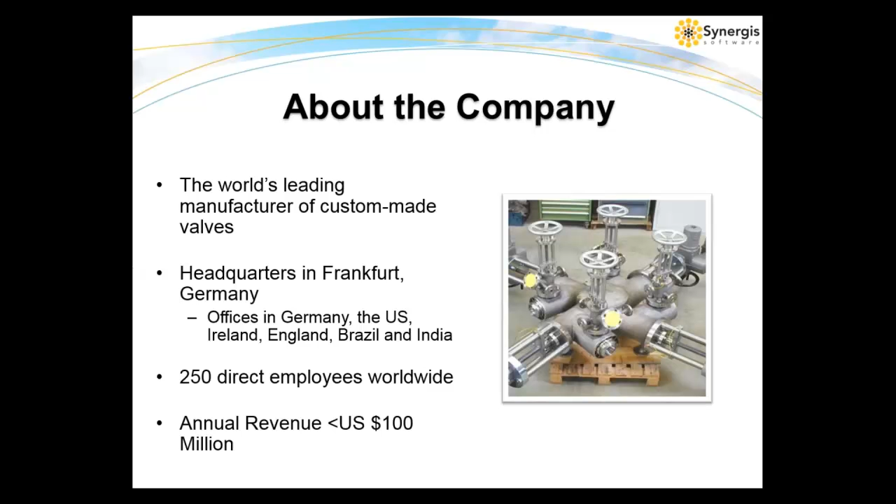SchuF Fetterolf is the world's leading manufacturer of custom-made valves serving many different industries. Customers of theirs depend on them for diverse industries such as chemical, fiber, pharmaceutical, and other process industries.

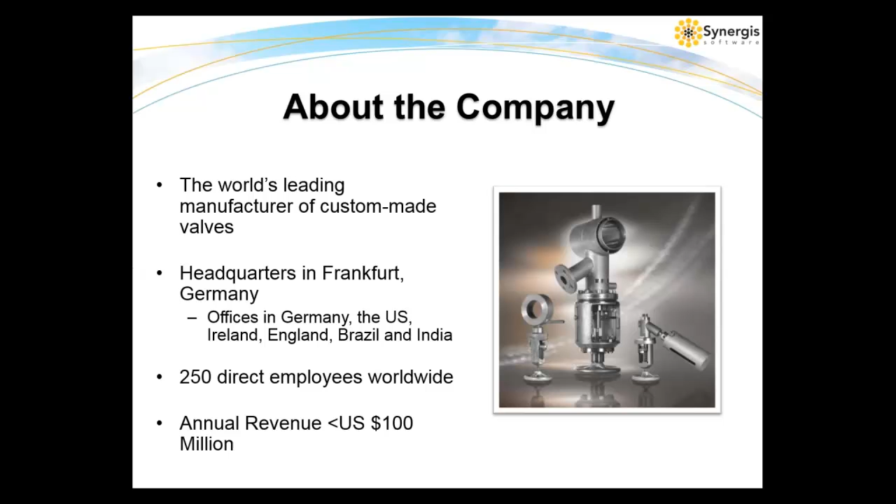SchuF's headquarters are in Frankfurt, Germany, with additional offices in Germany, United States, Ireland, England, Brazil, and India. They directly employ 250 people worldwide, and they have annual sales just under $100 million.

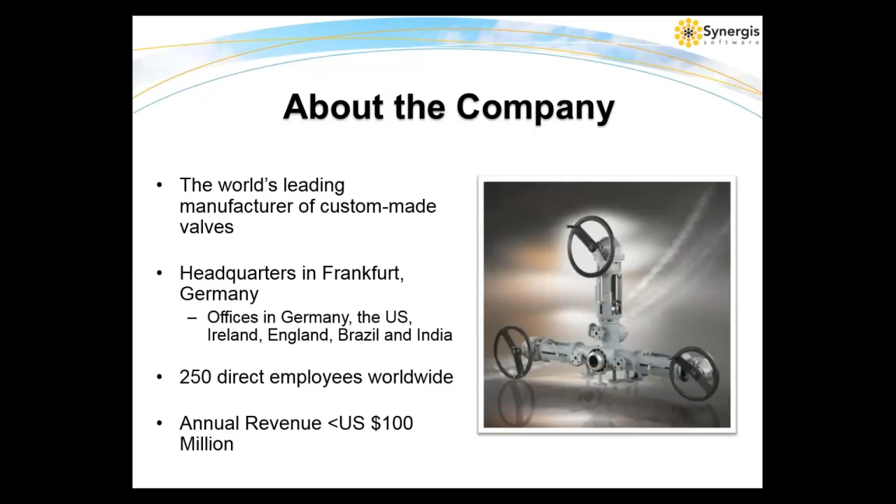SchuF's business challenges as a global manufacturer are similar to many multinational companies. They're continually under pressure to get their custom valve designs to market faster while maintaining the highest quality assurance and service.

They need to ensure resource leveling across global design centers to maximize efficiency and productivity. They also need to centralize all designs under one umbrella to enable design reuse, with a single integrated data management system for all global sites.

They need a PDM solution that provides the tightest integration with SOLIDWORKS and AutoCAD for revision control, design reuse, collaboration, compliance, and workflow automation. SchuF Fetterolf is also extremely focused on achieving their revenue and profitability goals. They need to control product costs, improve design process, and eliminate both resource and material waste throughout all global sites.

So in short, their goal was to create a single centralized repository of data that allows fast access and the ability to share licenses across continents and different time zones.

So why did they choose Synergis Adept? First, the product met their technical requirements, including Adept's very strong SOLIDWORKS integration, its ability to support central database managing data across global operations, the built-in viewer with markup and compare capabilities was huge, and a flexible license model that would handle concurrent licensing. All of these made Adept an excellent fit for SchuF.

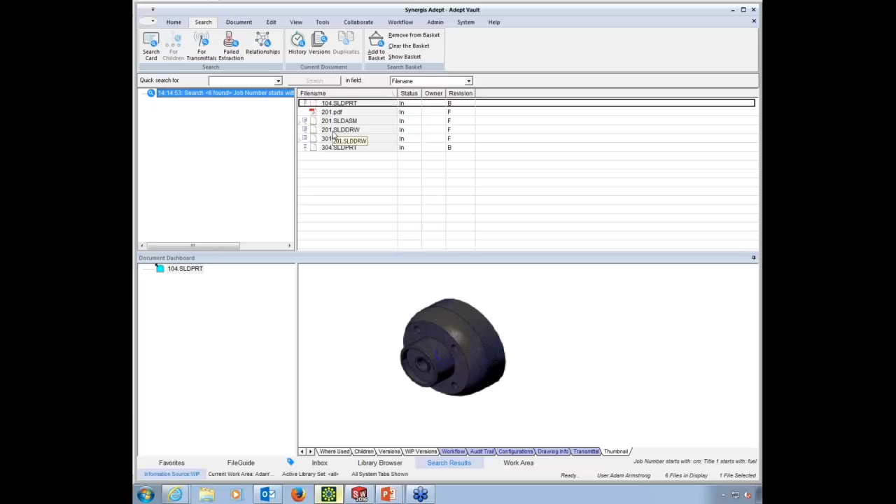These are extraction fields. They're linked to properties inside of, in this case, the SOLIDWORKS assembly, but they can also be linked to properties in Word documents or Excel spreadsheets—think of change notices or work orders. Same thing goes for attributes in AutoCAD drawings and properties in other CAD file formats like Inventor and many others.

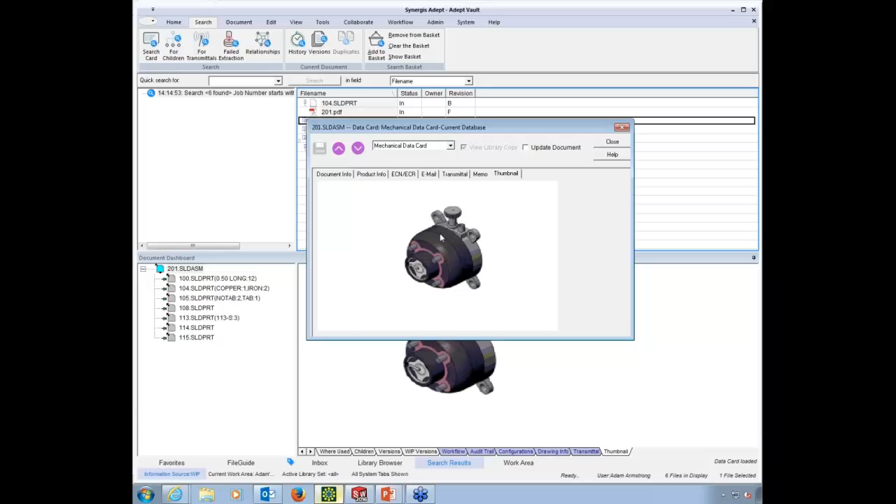Now, the arrangement of data here is my own choosing. I've got some fields and tabs for other document types. I've got a memo field where people can type in notes to each other, even see an image. There's a quick thumbnail of the file itself.

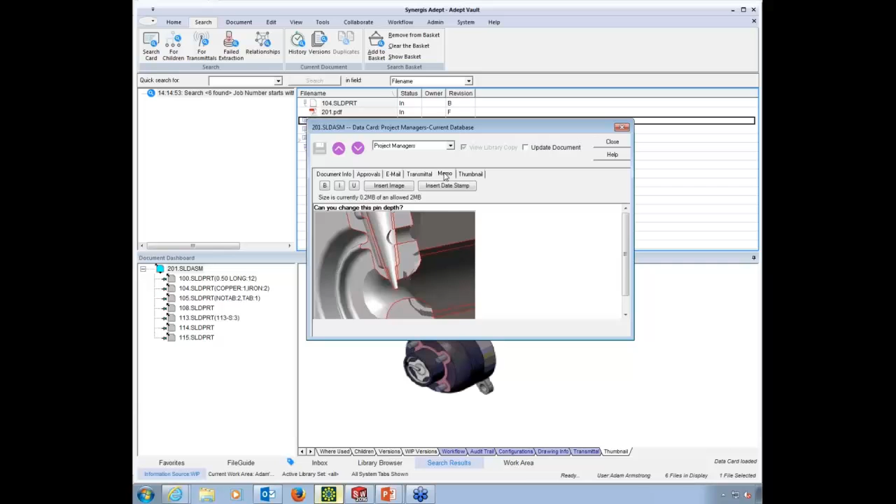Now, this card was designed for one group of users. It was laid out just for them. But you're going to have other groups that will want to look at things a little bit differently. Perhaps you've got some project managers—this is what they want to see, these are the fields they want to search on to find that document. Some of these might have exactly the same information in it. Some of them might have tabs of information that only they're supposed to see and others aren't. So these can be configured by administrators for your different groups or different roles of users.

Now, this data can also be used to locate documents in other ways. I can do it through a quick search rather than opening up the search card. If I know part of the file name begins with 20, I hit enter, and here's every file I have access to that has 20 in the file name. If 90% of the time you go looking for files you know the part number, or the job ID, or whatever field you might want to use, you can use that.

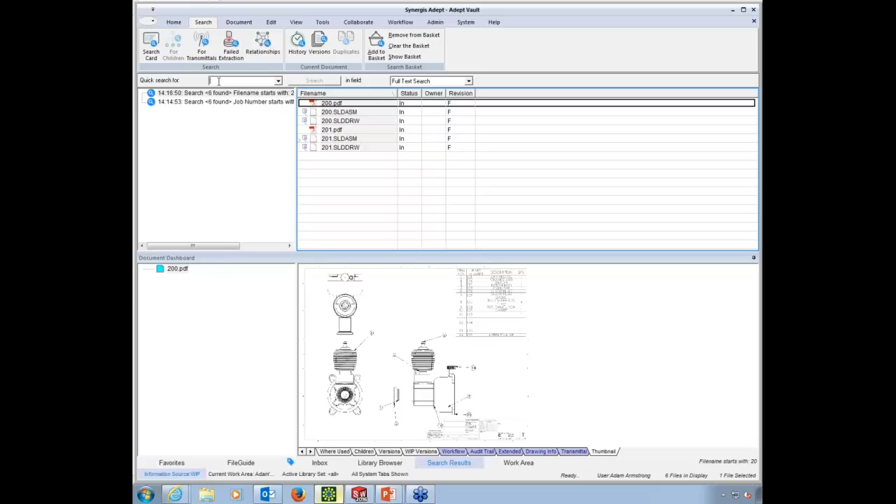There's also full text search in here. Perhaps you're looking at a printout or a plot and you see a certain word on that document—here's every file in the system that has the word 'initial' somewhere in it. It doesn't have to be a property, it just has to be text inside of the document. That'll work on a lot of file types, but not all. For example, full text search will not work on photographs, bitmaps, or JPEGs.

Another tool to locate files is called the File Guide view. What this does is sort the documents based on data that's familiar to you. For example, here I've got everything I have access to, but it's organized by product type first. I can click on that product type and see everything for it, then the next level in this example is who the designer was, then a file extension. I've located the files in a way that means something to me.

But another group may not understand things in that fashion. They might do things based on the job number first, then after going to a job number, go to a product type and maybe a file extension. They're still finding the same documents—they're just sorting them in a way that means something to them.

When Adept helps customers, when Synergis helps customers roll Adept out, we'll ask different groups what are the 2 or 3 general pieces of information you always know when you look for files. Based on their answer, that's going to make a great file guide view for them.

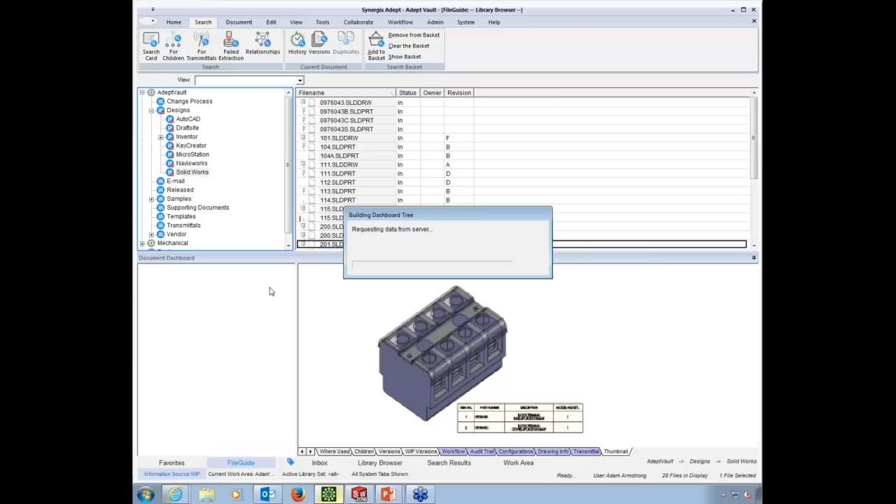There's also one called Library Browser that is the actual folder structure. For those users that in the past used to go to a J drive, then a Vault folder, then a Designs folder, and drilled their way down through subfolders to get to the files they want, they can still do that. The same structure is right here as was on the server when you first pointed Adept at it and asked Adept to manage those files.

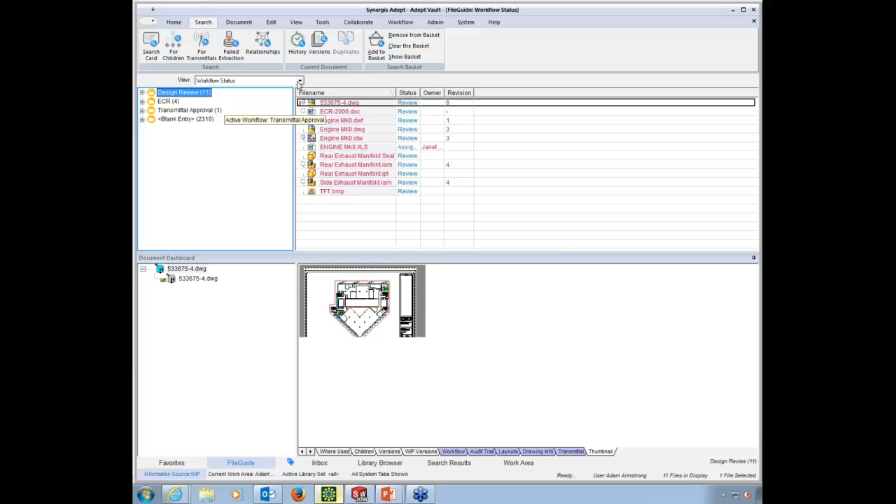What we find is most customers will fall back on this folder structure when they initially start using it, but very quickly they gravitate towards the FileGuide view to sort files based on information they understand, or they like going by the quick searches, being able to just type in one piece of information. There's also the ability to save any of your searches or lists as favorites, so very quickly you can just go right to those files without even dealing with the folder structure.

But regardless of what method you like to use, when you locate a file in Adept, you only find the latest version of that document, period. It's only when you have it selected down here in the document dashboard that you can see there are older versions of that document. Some users won't have any access to these older versions.

Others will be able to go back and copy an older version to create a new design. Maybe it's just like this one, but more like it used to be back on Rev D, and we want to get back to that one. So Adept will manage all of your older versions automatically for you.

For some of our customers, they'll track a separate field of information called revision, because they want to be able to bump up the revision when they want to. But Adept also has a feature that can automatically bump up their A's to B's and their 2's to 3's, and they can do that as properties or attributes in the drawing files.

Also down here, we're able to see all the relationship information. You may notice there's some different symbols next to these files. Those are dictating that there are parent and child relationships. Just by clicking on one, immediately I can see a listing of children, and I can get a detailed listing of the children.

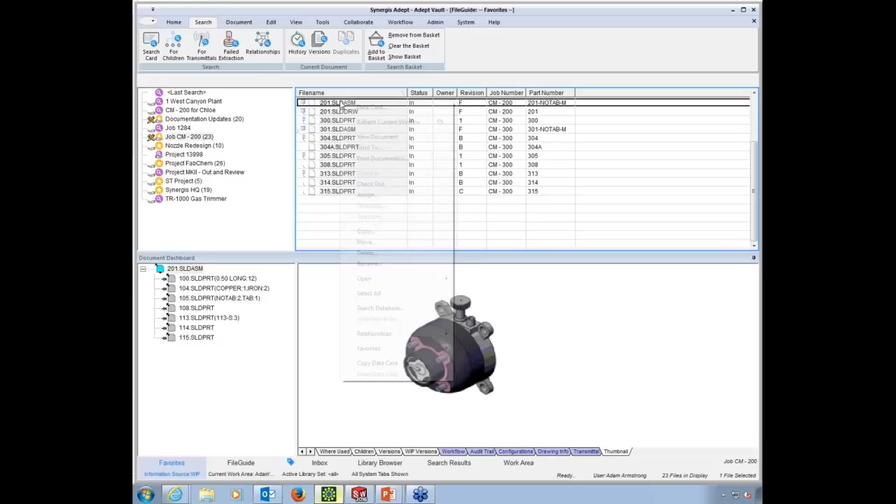Integrated with every license of Adept is a visualization tool from Oracle, which enables all users to view hundreds and hundreds of file formats without requiring that specific software on their system.

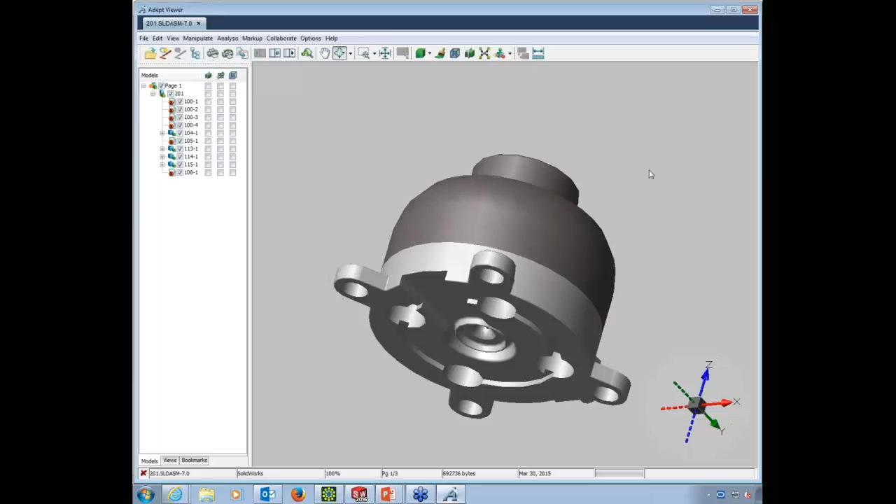So users can go in and be able to look at an assembly file or a drawing file without needing that software. I can zoom in and out, and I can turn parts on and off.

There's also an integration with this viewer from Synergis that controls what users can do. For example, some users, the option to print for this job might be grayed out. You may want a certain group of people not to be able to print or plot. Same thing goes for converting to other file formats like PDF or JPEG. You can give or take away that ability.

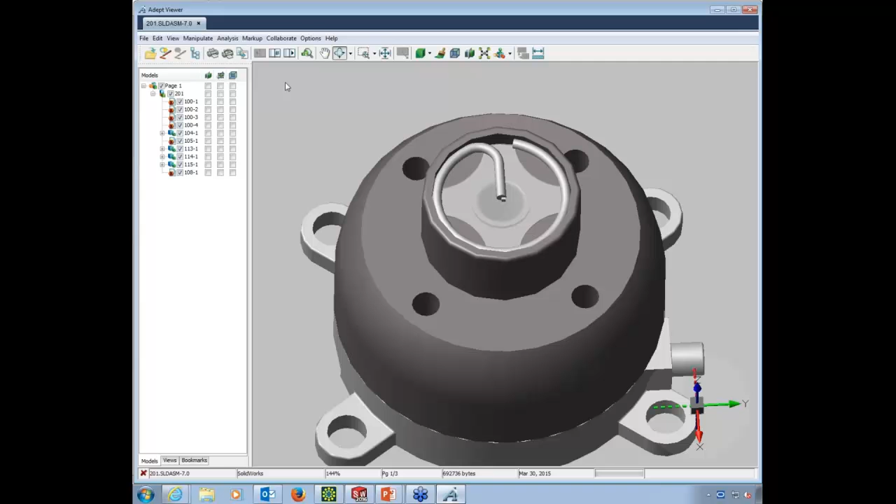Marking up documents, same thing here. I can go in and say I want to create a note right from this edge, and I'm just going to put in a small leader, and I'll say change cover.

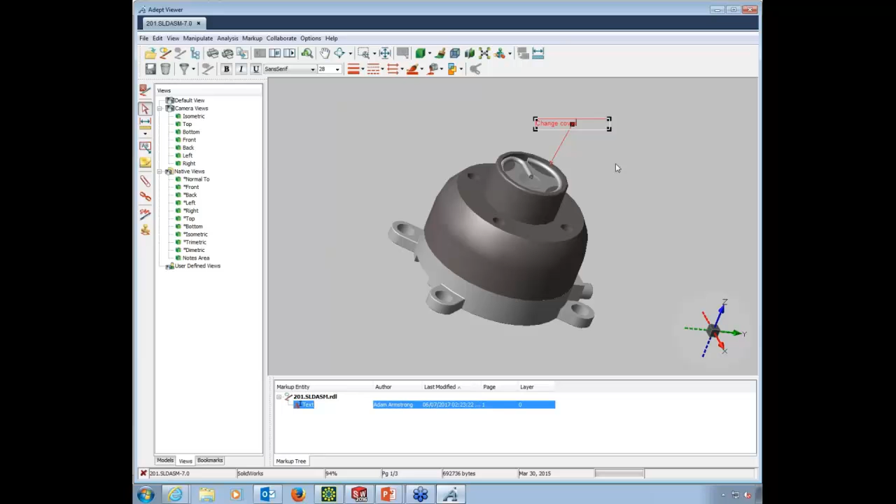And you'll notice down below that it keeps track that Adam made that comment on a specific date and a specific time. If somebody else comes in and adds their own comments or markup information, it'll keep track of each of those down below.

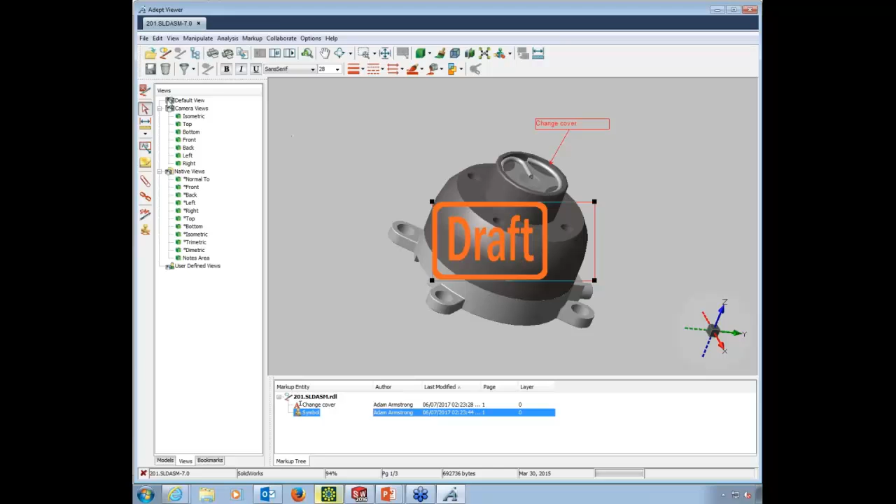Another big benefit is that this file itself isn't being edited. There's no editing allowed from the viewer at all. So I can say yes, I want to save this markup information, and Adept saves that as data about that version of the file, in the red markup or red line memo field. So when somebody views this particular version, they'll be able to see that markup information.

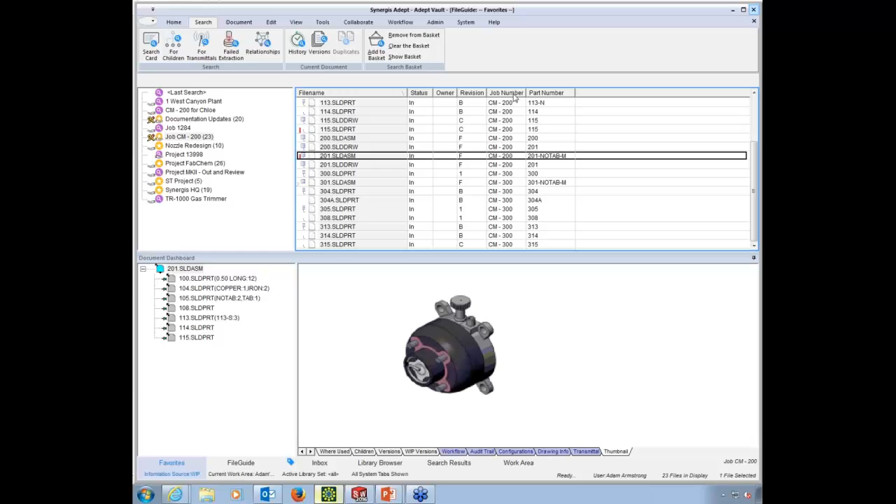Also, I forgot to mention these columns of information. Anytime you have a listing of files, you can pick and choose a subset or a whole group of them, and there's the ability to go create reports. You can do quick portrait reports, landscape, formatted reports, and it'll use the data you've got selected here. So very easy to go create different file lists.

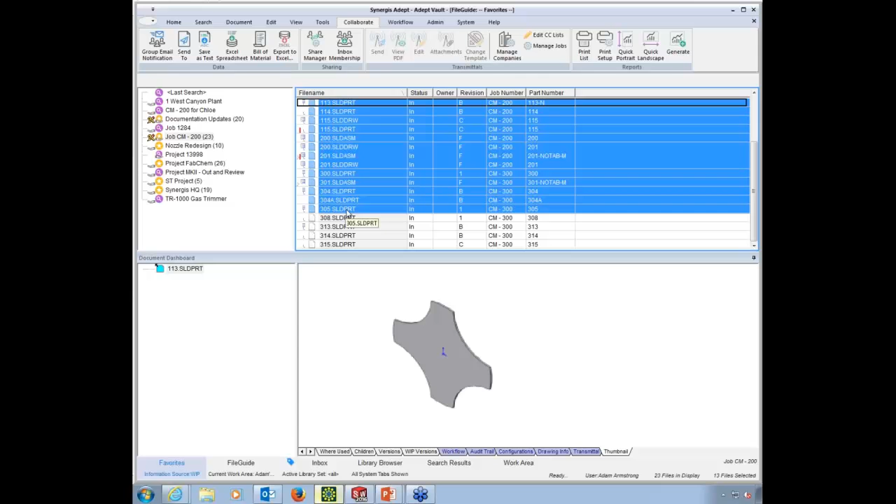Now, for some of our customers, this is the beginning of a change process. They found a file, and typically it would have been the drawing file. We're going to work with the assembly today. But they would then, after marking it up, right-click and maybe just assign it to somebody for them to do the work.

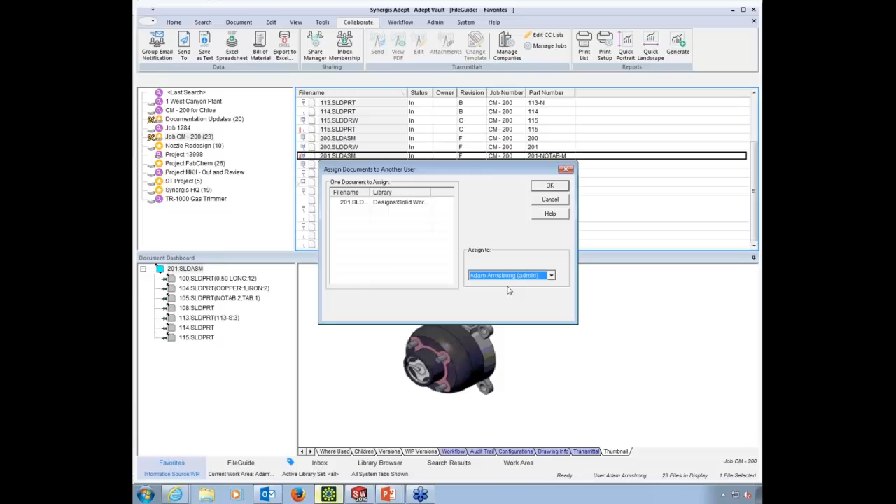So in this case, I can pick Adam, and if I've got it configured, that could send Adam an email. And in that email would have a link that would bring him right to the file I assigned to him. If I had selected a 1,000-part assembly and assigned them to Adam, he would get one email with one link that brings him to a listing of all 1,000 files.

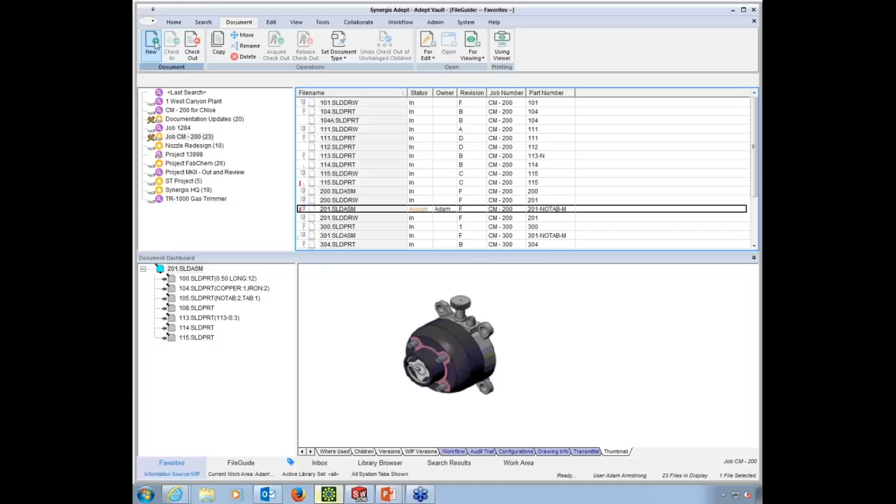But for some of our customers, they want a little more of a formal process besides marking it up and assigning it. They want users to be able to create new documents right from within Adept, and you can do that. So right from here, I can say I want to create a change request.

It's using a specific template. I've set up a naming convention where it requires some information, and I'm just going to type in a few key pieces of info, and this is building a file name. Adept also assigned it a next available number as part of that file naming convention. Every customer of ours has a different naming convention. This is just one example of one.

And in this case, I'm going to open it up inside of Excel, but this template could have also been a Word document. Excel is giving me a hiccup here. There we go. So here I can see I've got different fields of information.

And these are all properties. So if somebody types in any information, it will automatically fill in. I cheated a little bit - I created some of these other fields. I've got some where engineering review can put in their name and their signature and any notes that they may have. So all of this information is linked to Adept.

So when I come back here, you're going to see in a second, there it goes, it just read that information. If I look at the data card, I created a special one just for this type of stuff. You can see that's exactly what I typed in. So that becomes very useful information that doesn't have to be typed in twice. In fact, some of our customers don't even open up the document.

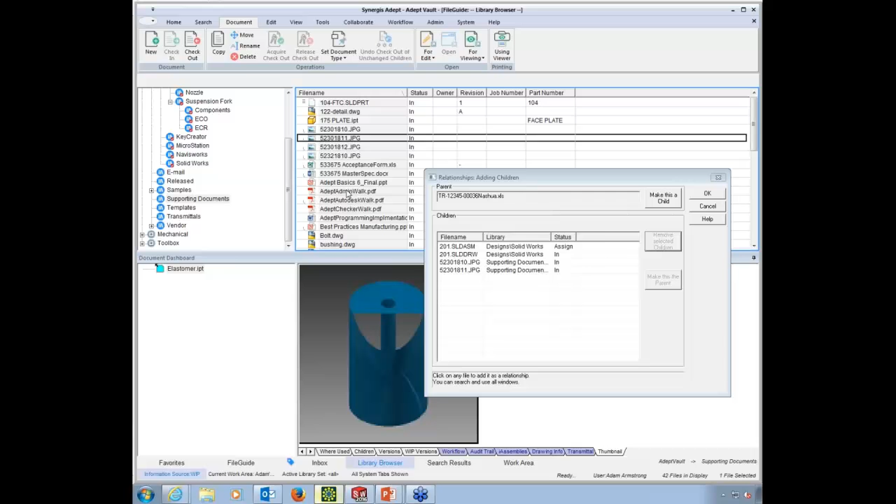I can also use other search methods and say there are some supporting documents. There's a JPEG, 2 images of the problem, and a master specification.

So now the idea is very simple. Anytime somebody finds this change notice, right away they can see a listing of all the related children. They don't have to go to those separate folders to locate those files. Right from here they can view them or check them out or mark them up or print them, whatever they need to do. So you're creating your own packages.

All right, so as a designer, I've gone in and I've located my documents. I know I'm getting the right one. We talked a little bit about this audit trail down here and everything that's happening to those documents for different regulations or audits that you have to go through. That's very useful information. Actually, I got to go back to one of these guys here.

There we go. So if we look at the audit trail now, we can see this is all searchable and reportable information. So as a designer, I'm going to kind of switch hats here.

Maybe I'm ready to do this actual design work. I can right-click and check it out from here, or I can go right to the CAD application. So in this example, I've got something called the Adept task pane inside of SOLIDWORKS. The exact same task pane is also located inside of AutoCAD and Inventor. The idea is very straightforward.

If I need to perform a search, I can pick and choose whatever fields I want to use, so each user can pick the ones that they most commonly want to be able to search on. In this case, I know part of the job number, I can type that in.

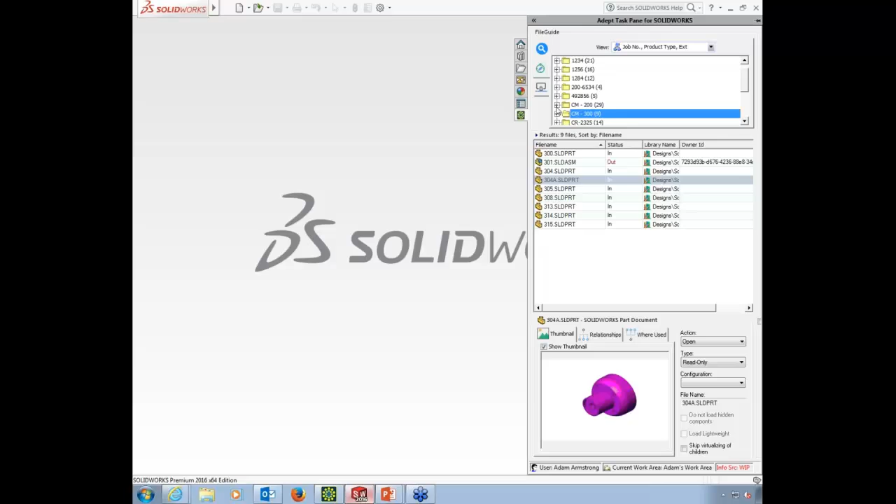Let me try that once again. That was weird. If I want to see the file guide views, I can use those, so I can sort based on the job number. I can locate the files in that fashion.

So the same tools that we saw on the desktop, you can also have right here inside of, in this case, SOLIDWORKS. If I'm ready to work on something, I can open it read-only or check it out. I can also look to see if anybody else is currently editing any of the other files. And all actions with the task pane are drag and drop.

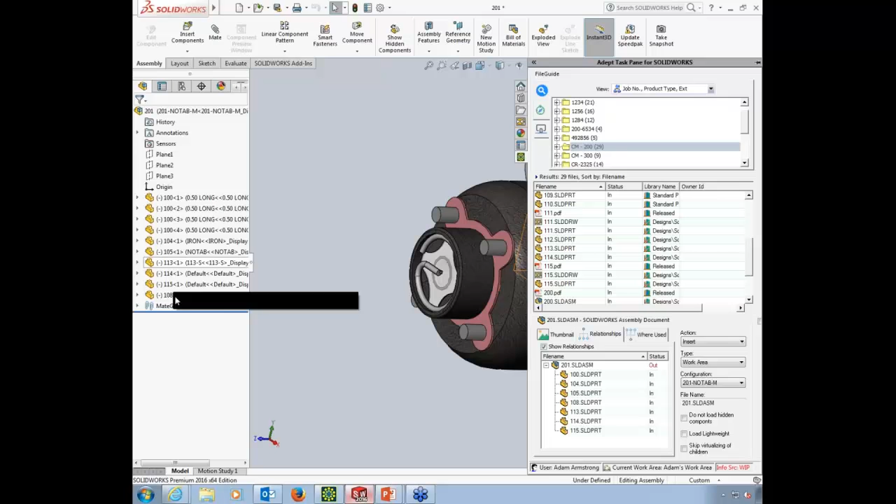Adept knows that I need to be able to see that entire design, and so it loaded up all those parts in the background for me. So I'm referencing them all locally. I don't have any editing rights for those.

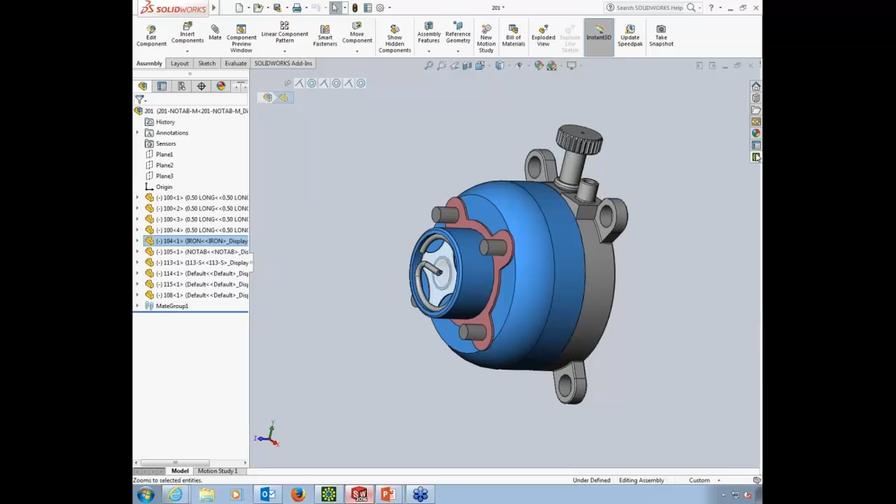If I do need to edit one of these at any time, I can just right-click and I can check it out. Or I can even look at the Adept tree structure up at the top, and I can check those out from there. I can also use this same task pane to insert other parts.

If I come over here, I can select a replacement for the one that I've got. Let's see here, we'll get a thumbnail view and take a peek at this one. That's the new one I want. Rather than insert, I can just go with a replace, drag and drop. And granted, they had to have the right mate locations for that to work smoothly, but all the action, the interaction is done with drag and drop.

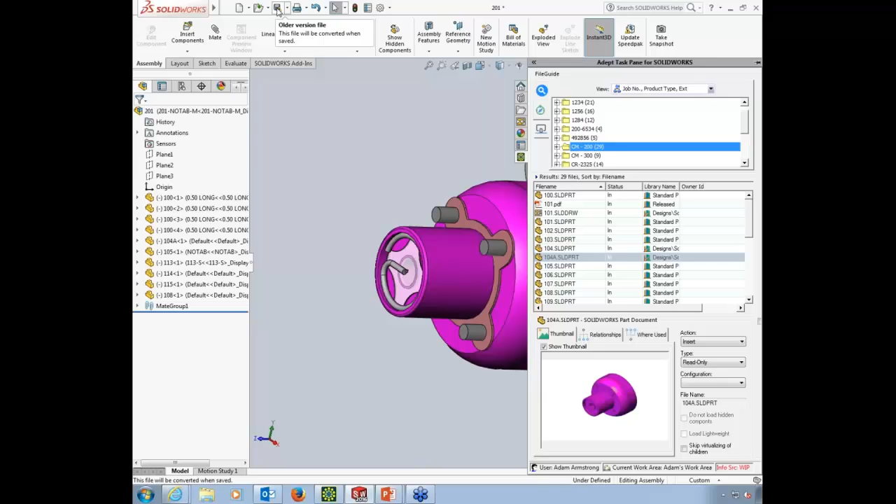And again, that goes for Inventor as well as AutoCAD or AutoCAD-based applications. So I could also just very, very easily go and check out the drawing file for this right above it and have that update as well.

For the sake of time, though, I think we're going to go back to the Adept desktop. And so while I was editing this file, everybody can see in bright red that Adam has it currently checked out.

It doesn't matter what search method they use, there's only one method of locating that actual file, so everybody knows, and it copied that file and put it in my work area. My work area is just my own local folder.

This can be configured by an administrator for users so they can decide where people's work areas are, or they could be given the ability to create their own if they have a need for that method as well. So now that I'm done with this, I'm ready to check it back in. But before we get into workflow or what's going to happen to this file as it gets checked in, I want to mention a couple other items that I think are really important.

One of those is bill of materials. Adept has the ability to go and create a bill of materials from SOLIDWORKS using the Adept relationships, meaning using these relationships it will create a bill of materials.

For some of our customers that's really important because they create records that represent parts they don't actually design, and they create those relationships just like I did earlier with that change notice. I right-clicked and said add a relationship, so I could add a certain kind of packaging or a certain kind of grease or paint, but that would then be in that bill of materials.

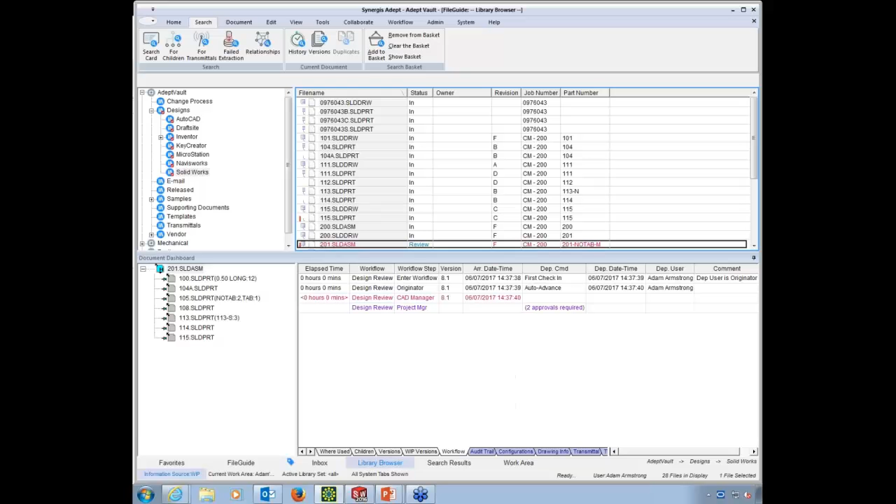That's an option in Adept. You'll also notice if we come back to the structure here, we can see it's in review, and if I click on the Workflow tab, I can see exactly what step of the process it's in and what steps it still has to go through before it becomes approved. I can right-click and say who's responsible for that, and it'll tell me who's in charge of those steps.

Those users can also use this WIP version where they can select both versions of the file, view them both at the same time and compare them, and it'll highlight in color what's different between them.

But for the sake of time, let's say that I came in and approved this document. I also set up a rule that it cannot move on to the next step unless they type in some kind of a comment, just to make sure they were paying attention to what they were doing. Now we can see down below here that Adam says it looks great on this date and time, and now we're waiting for two folks in the project managers group to approve it, and then it'll become the new official version.

So Adept enables you to create your own workflows. You can even assign the ability to some of your user community as workflow administrators, and they can take care of their own processes.

And this can be for any process, like a vacation request. If somebody comes into Adept and says file new, fills out a vacation request form, and saves it into the HR vacation folder, it'll begin that process.

Here's the design review process we were just looking at, and it has 3 different steps. I can add and remove steps, rearrange their order if necessary. I can set up emails to go out on final approval—this may be for non-Adept users, just people that need to know it's hit the end of that process.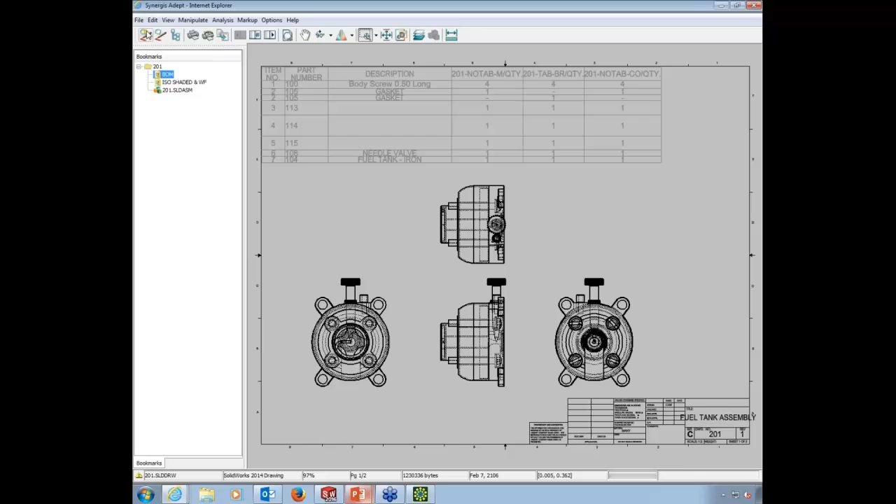So this viewer really enables a lot of users without any kind of CAD software or any high-end system, really just a web browser, to be able to go and view, search, print, markup. They've got the same tools. If somebody else had these marked up, they'd be able to come in and add other comments, zoom in and out, all that kind of stuff. Very, very powerful. So these are really able to give all of your users in very different teams very quick access to documents with nothing being installed on their system.

All right. So all of these things that you've seen today really mean a lot of great things for our customers: faster product or project delivery, more efficient operations, improved quality, lower cost, and reduced risk. And it's easy access to relevant data for better decision making. Those are all very, very important.